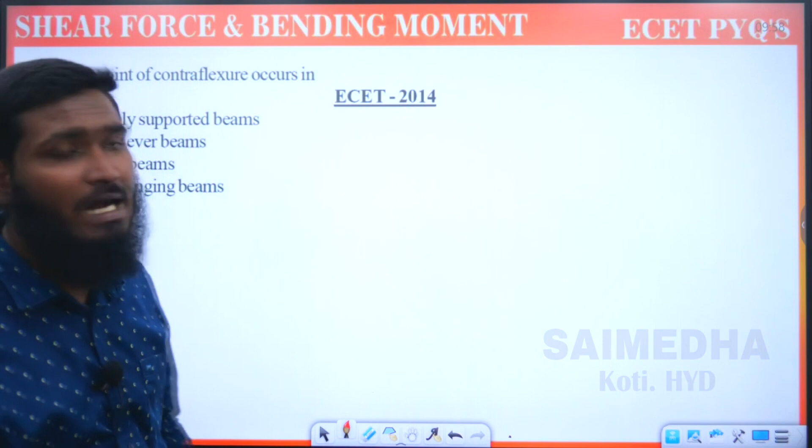Now the next point: the point of contraflexure occurs in. Now what is the meaning of this contraflexure actually? First let us discuss this part - what is the meaning of point of contraflexure?

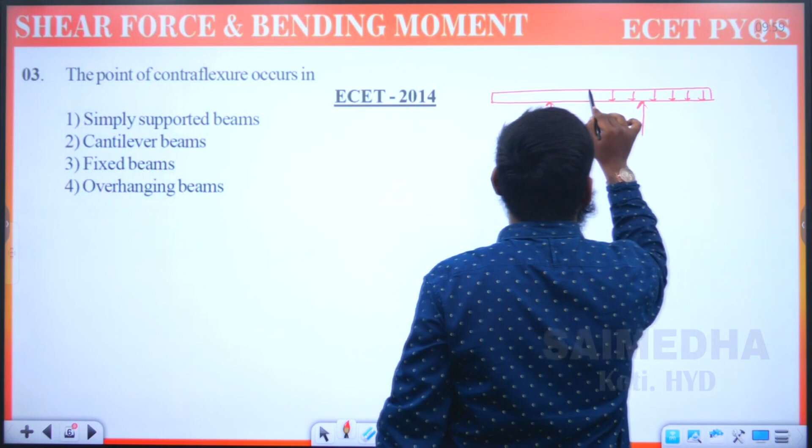Point of contraflexure means - let us take one simple example over here. First let us try to take the example of a double overhanging beam. If you are taking a double overhanging beam, this is the double overhanging beam we have taken, and we are having a UDL on this.

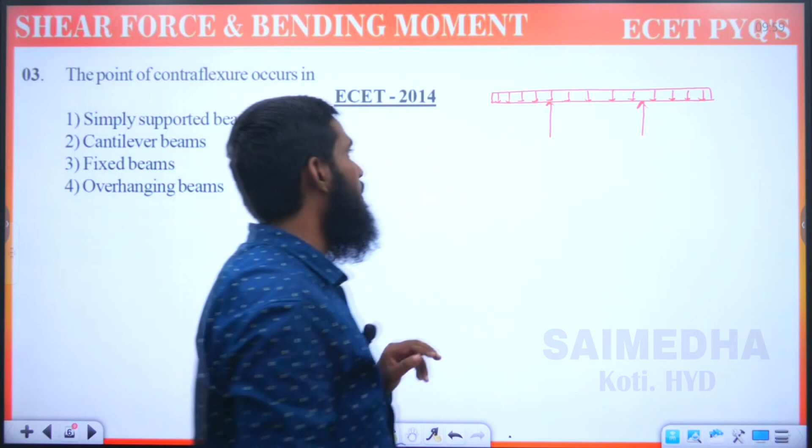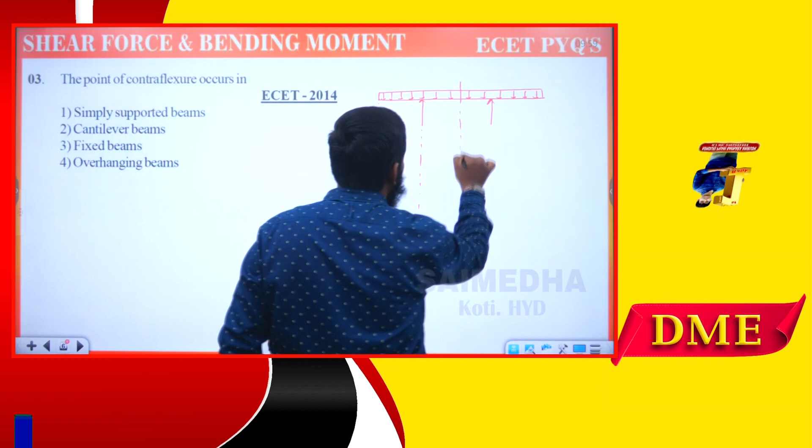I am giving the direct shear force diagram and bending moment diagram for this double overhanging beam with the UDL. Now let us take this part, now let us draw the shear force diagram and bending moment diagram for this.

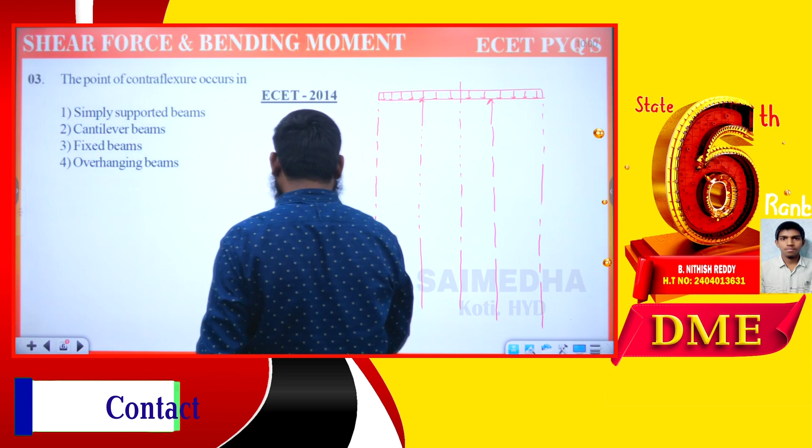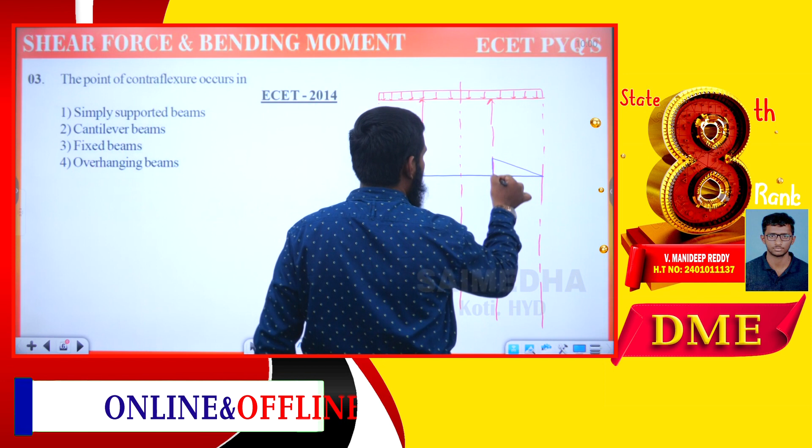So if you are taking this one, the shear force diagram for this will be getting it as - let us take this part as this one, and this part, then this one and this part. Okay, so this is the shear force diagram we are having for the double overhanging beam with UDL.

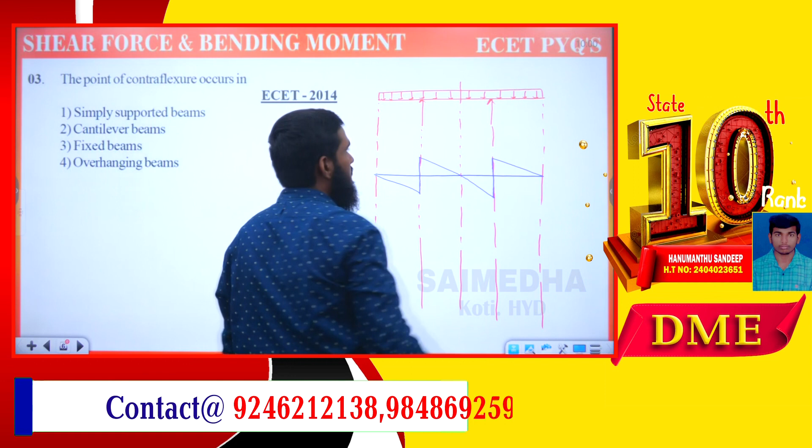Directly I am drawing over here. We are not having any concept for this part, meaning we are not interested in it. Directly whatever the question we are having, we have to remember the diagram, that's it.

Now let us draw the bending moment diagram over here. So for the bending moment diagram, what we are taking - let us see this part. So for the bending moment diagram, we are getting this part as, okay, like this, something like this. We'll be getting the bending moment diagram for this.

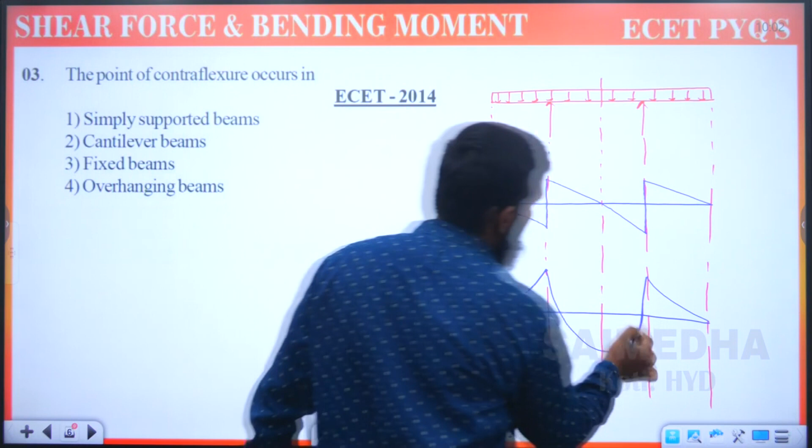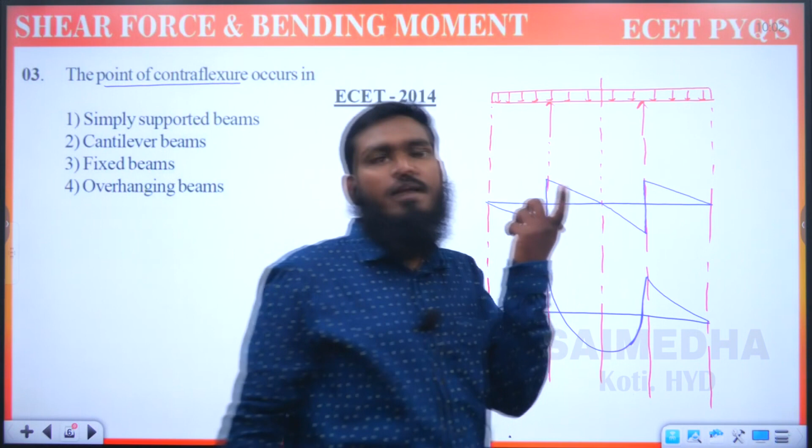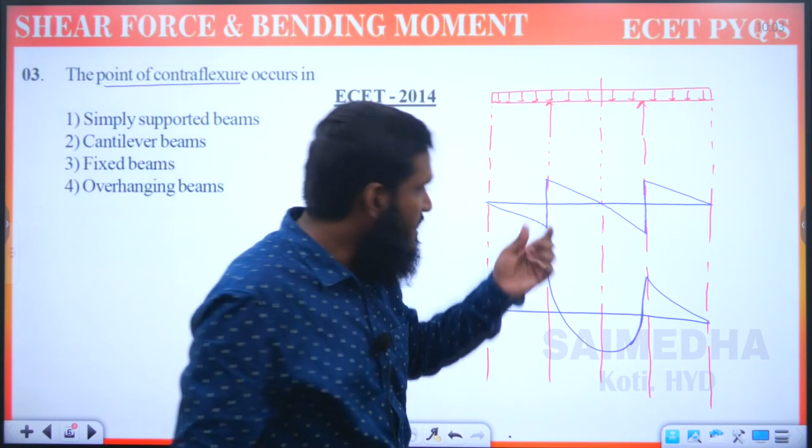So whenever we are having the shear force diagram and bending moment diagram, now what is the meaning of point of contraflexure? Point of contraflexure means whenever the bending moment is changing its sign. Leave the shear force diagram, we are not concentrating on that. Now we are concentrating only on the bending moment diagram. In this bending moment diagram, whenever the bending moment value is changing, meaning from positive to negative or negative to positive, that we are calling it as a point of contraflexure.

So this part we have taken over here - this is point of contraflexure we are having, and this is also a point of contraflexure we are having. Sometimes it will be given that the bending moment is 0.

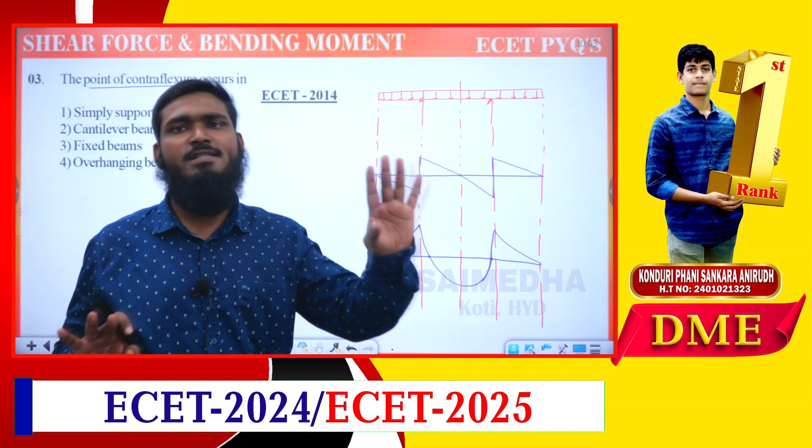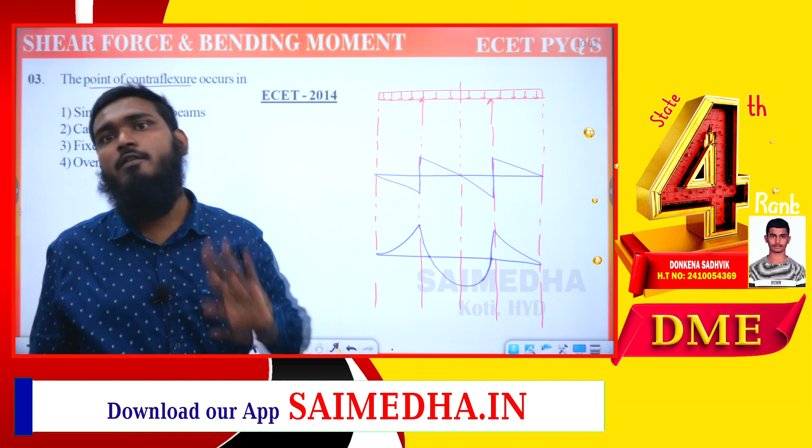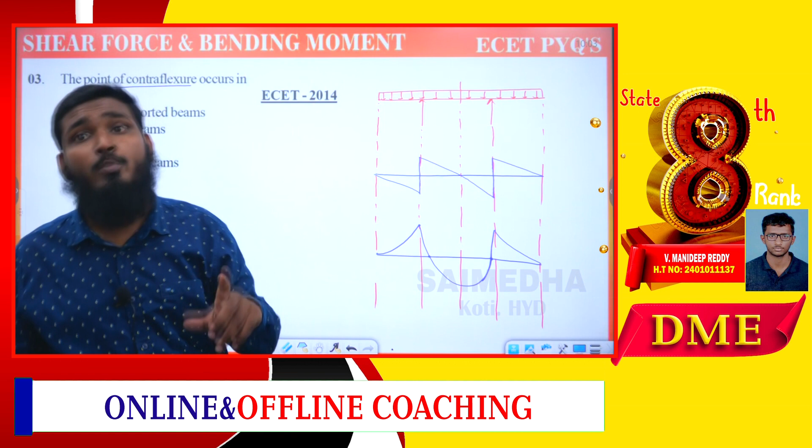In some cases it is also correct whenever the bending moment becomes 0. But if the options include that the bending moment changes its sign, that should be our first preference. Changing its sign means from positive to negative or negative to positive. If that option is not given, and instead it says bending moment is 0, then we can take that as a second preference.

This is the meaning of point of contraflexure. Now what is our actual question? The point of contraflexure occurs in which beam: simply supported beam, cantilever beam, fixed beam, or overhanging beam? Directly we can say that in overhanging beam we get the point of contraflexure.

But let me give some important points. First, take cantilever beam - here is the point of contraflexure. How many points of contraflexure do we get here? You can remember directly: first we take cantilever, second we take simply supported beam. In these two beams, we are not getting any point of contraflexure, so it will be 0.

Now next we take propped cantilever. If you take propped cantilever, and also a single overhanging beam, then we get 1 point of contraflexure in each. In both cases we are getting a point of contraflexure.

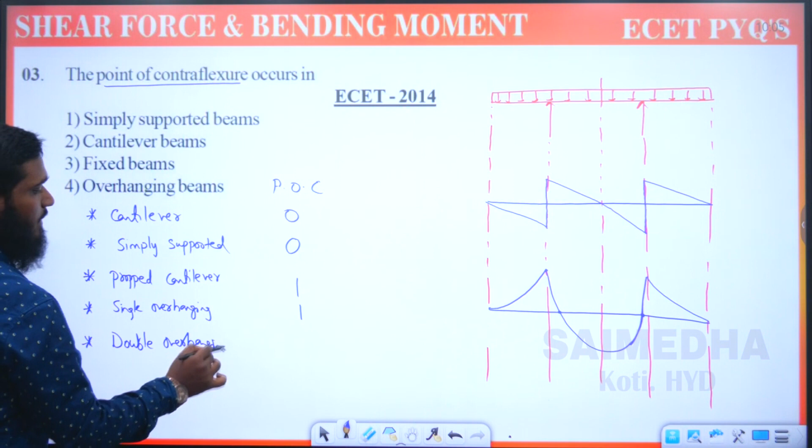Now next we take double overhanging beam, and the next case we take fixed beam. For fixed beam as well, we get 2 points of contraflexure.

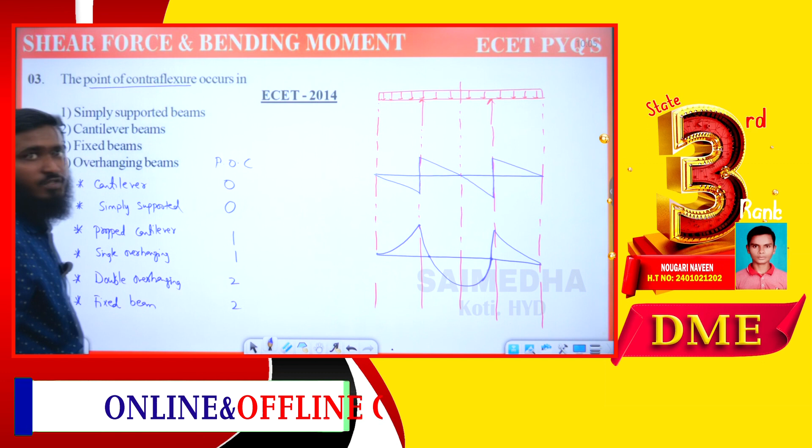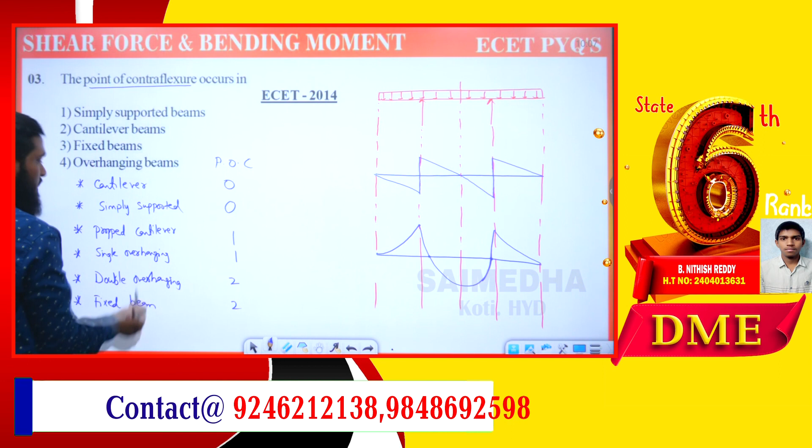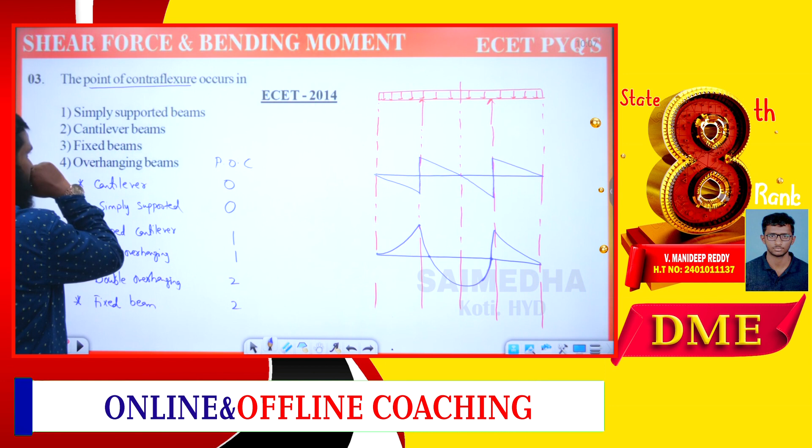So looking at this question, for point of contraflexure: simply supported beam we have 0, cantilever beam we have 0, but for fixed beam as well as overhanging beam we have the point of contraflexure. So actually both options are correct, we can go with both. As per the ECET key, the answer given is overhanging beam, but both options are correct.

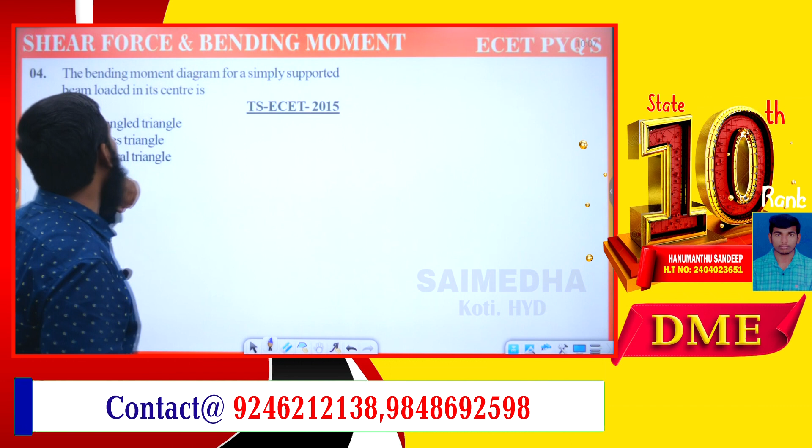Now let's go to the next question: the bending moment diagram for a simply supported beam loaded at its center. In this first question, we have a simply supported beam with a point load at the center. So what is the bending moment diagram we get?

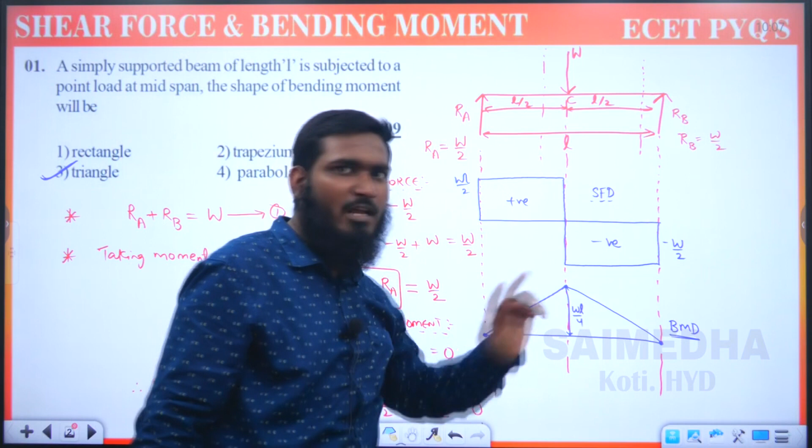The bending moment diagram looks like a triangle, but which type? Either right angle triangle, isosceles triangle, or equilateral triangle. Right angle means one of the angles should be 90 degrees - we don't have that here, so it's not right angle. Equilateral triangle means all 3 sides should be equal, but here this side is equal while this other side is somewhat longer, so it's not equilateral either.

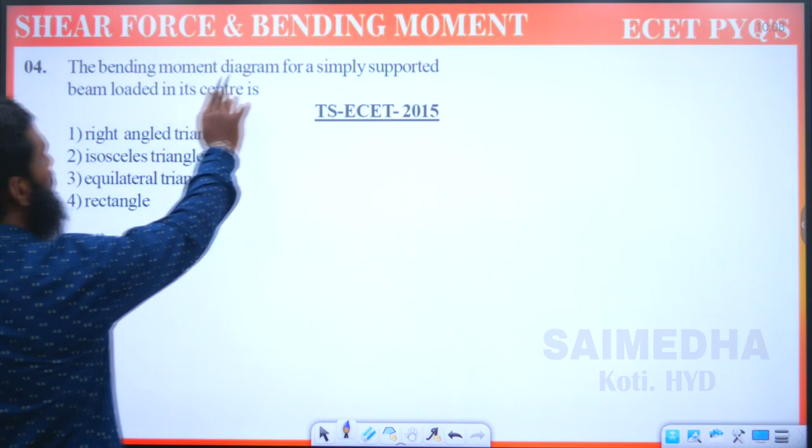So if any 2 sides of a triangle are equal, we call it an isosceles triangle. Using the same diagram and question, what is the answer? The bending moment diagram for a simply supported beam loaded at its center is an isosceles triangle.

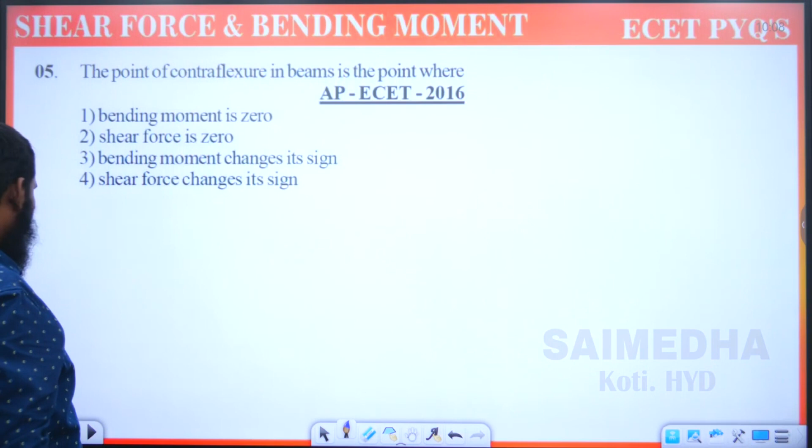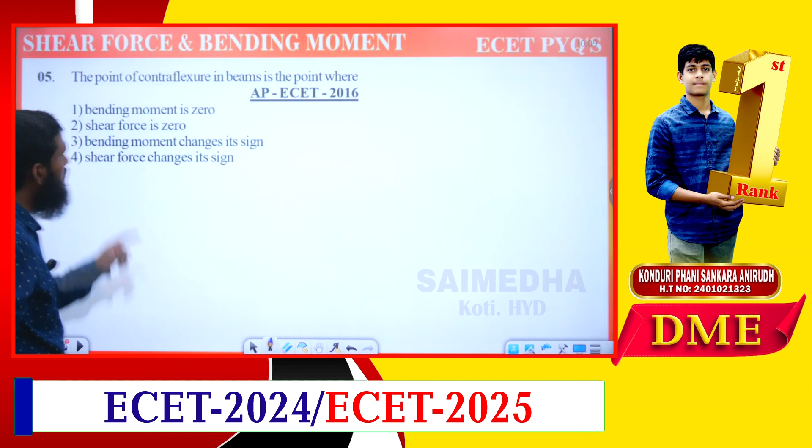So what I have told you, if this point is given, we have to go for that answer only. Suppose if this part is not given, then we can go for the second preference as bending moment is 0. So we are going for this part, bending moment changes its sign. Third option is correct.

Now next question: in a beam where shear force changes sign, the bending moment will be. Now same case we have taken over here, listen carefully.

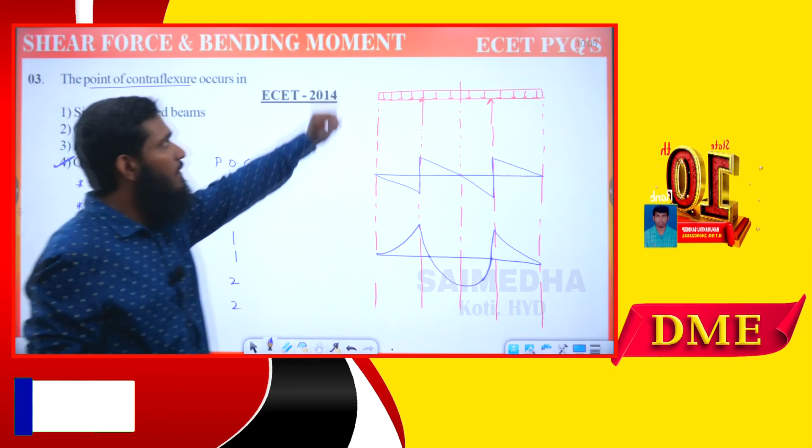In this also, if you have taken this part, this diagram we have taken, and we have taken one more diagram in this also. Suppose if you are taking this diagram over here, what we are getting, this part is shear force, it is becoming 0.

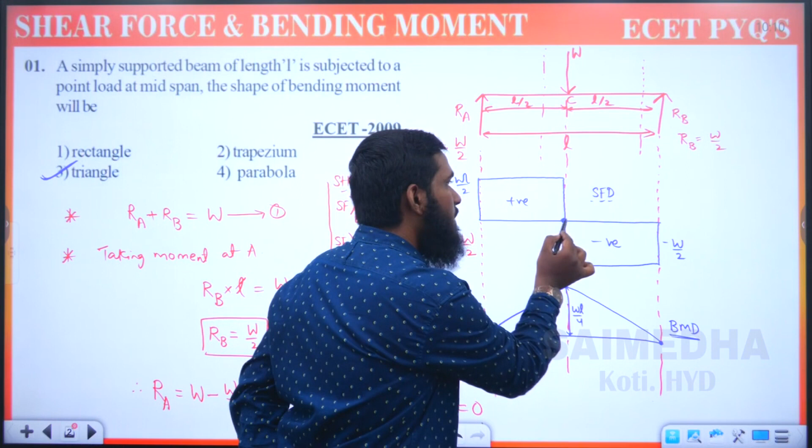So whenever shear force is becoming 0 over here, listen carefully, whenever shear force is becoming 0, what is the bending moment we are getting? Bending moment is maximum. So for this part we have taken over.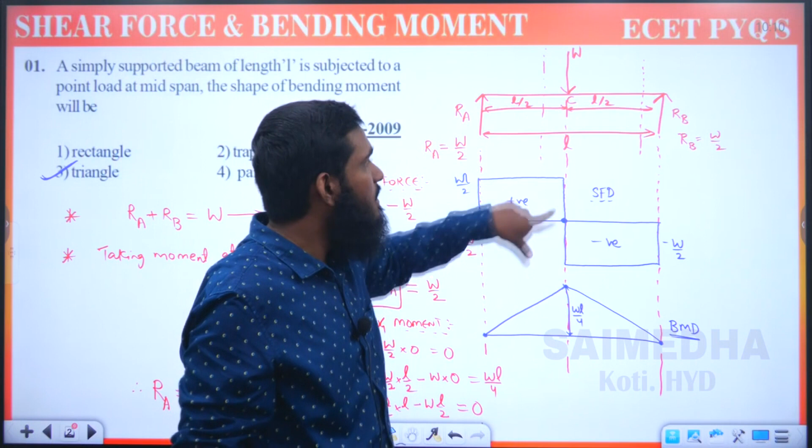If you are considering this example, we can take shear force equal to 0, means what is bending moment we are getting? Maximum. But actually what you have to remember is whenever shear force becomes 0, it can be maximum or minimum.

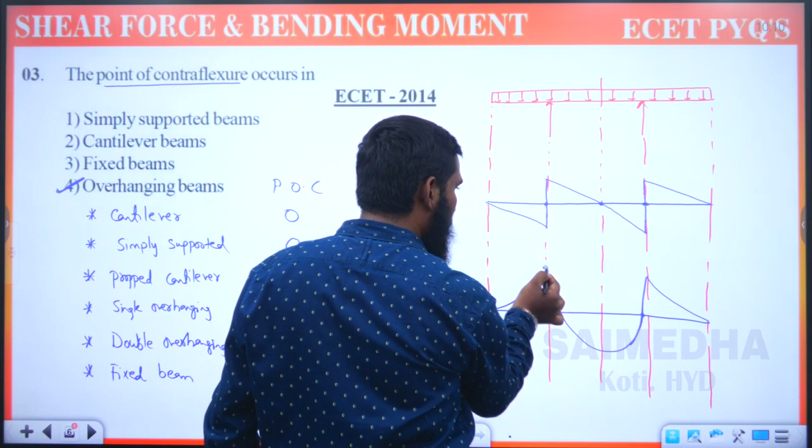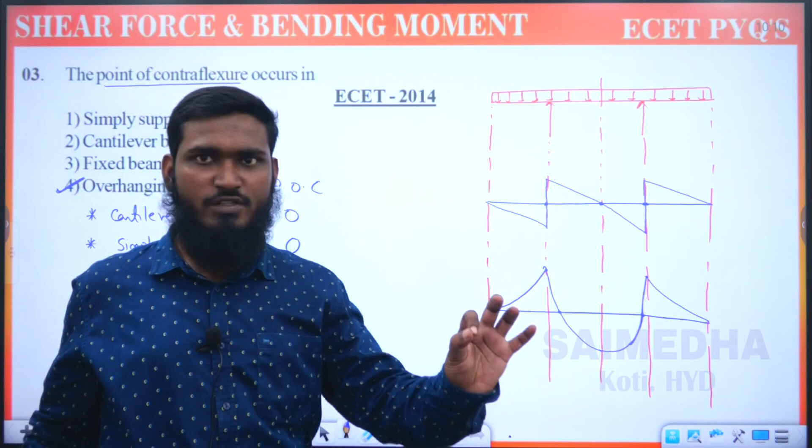So over here whatever values we are getting, these are bending moment values. Shear force is becoming 0 at multiple points, and at these points what is bending moment? If you check those values, we are getting one minimum value and one maximum value. So we can't say directly that whenever shear force becomes 0, the bending moment will be maximum only or minimum only.

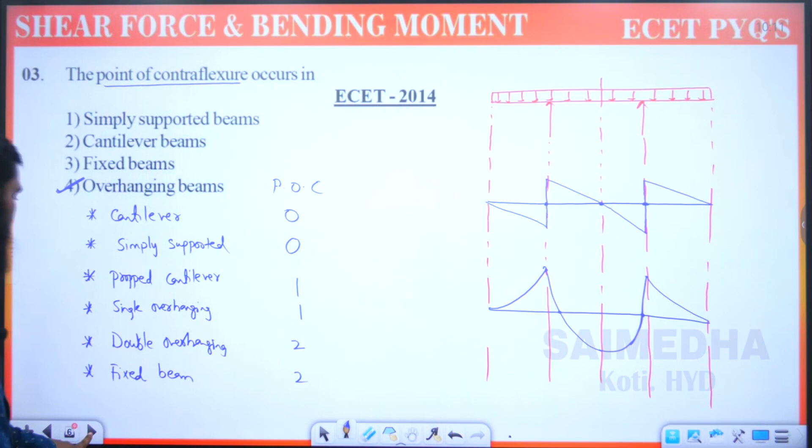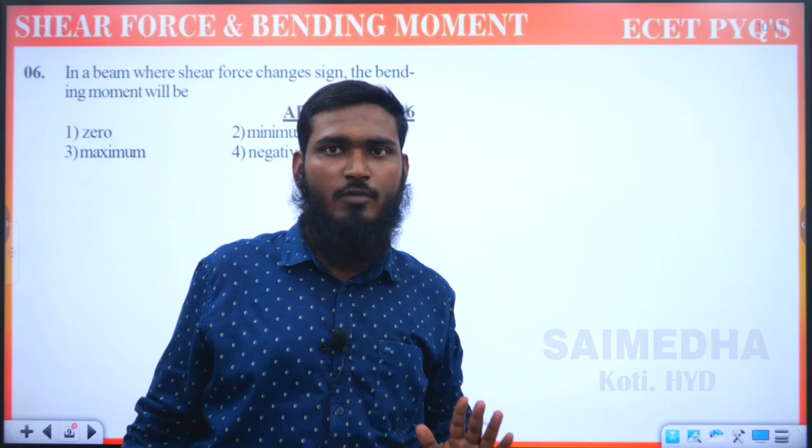We can't decide that part directly. It can be maximum or minimum. But if you are seeing this question, listen carefully: if it is mentioning maximum or minimum, either one, then we have to go for that option. If that option is not given, then what do we do? 0, minimum, maximum, negative means...

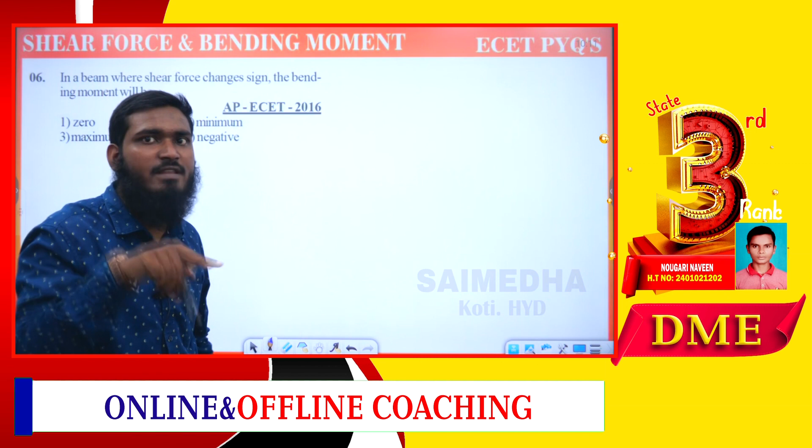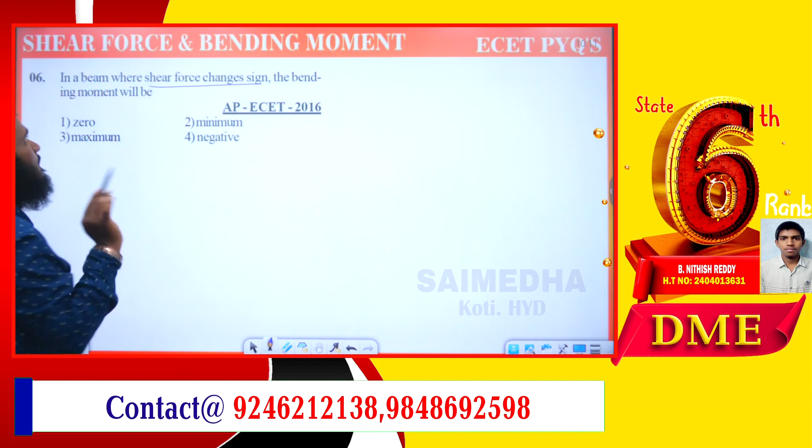So the first question we took was a simply supported beam with a central point load. According to that example, we assumed that whenever shear force becomes 0, or whenever shear force changes its sign, the bending moment will be maximum. So if maximum or minimum is given as an option, we go for that. If that's not given, then we go for maximum.

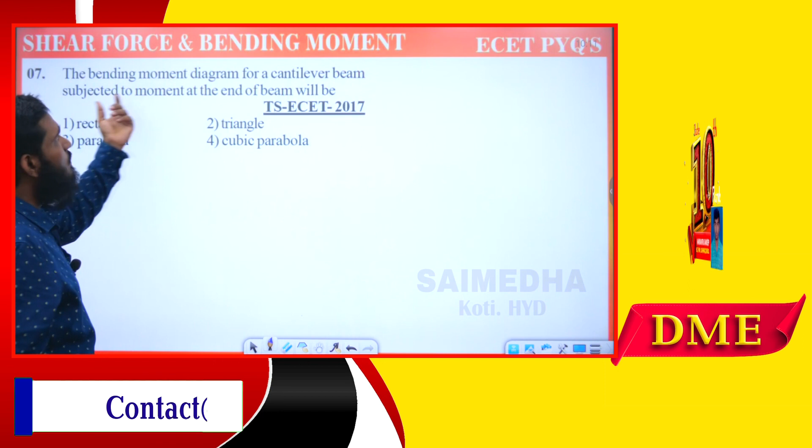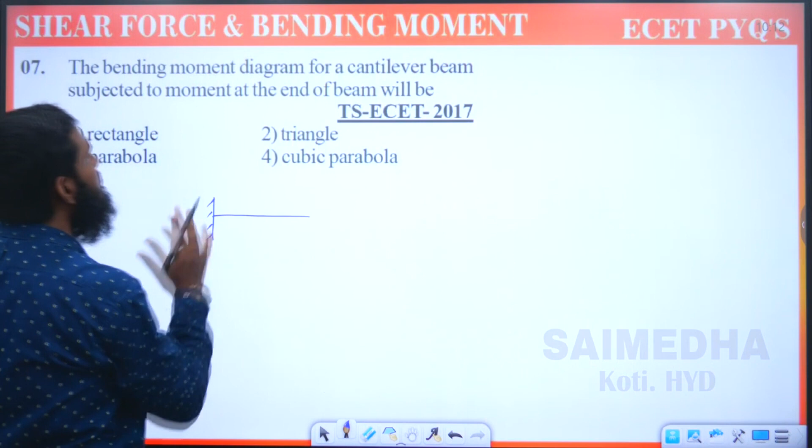Now next question: the bending moment diagram for a cantilever beam subjected to moment at the end of the beam is. So what we are having for cantilever beam, we are having the moment over here.

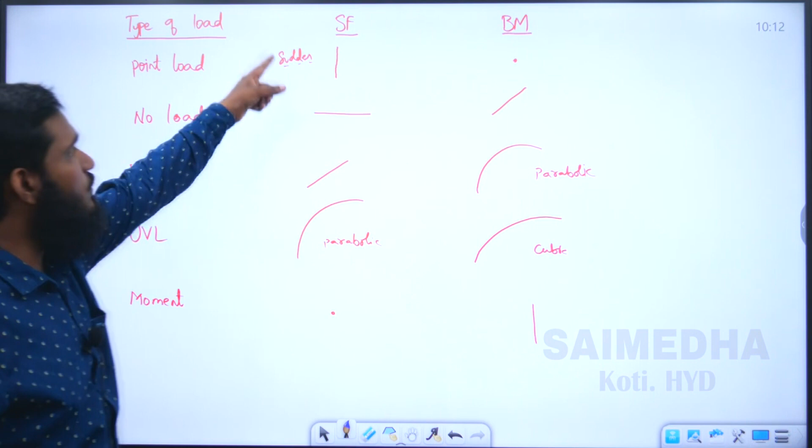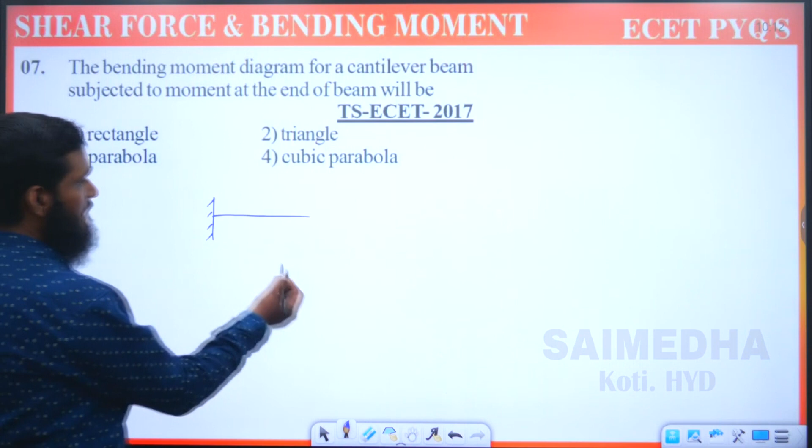If we are having moment, for shear force it will be a point, and for bending moment it will be a vertical line. So whenever we are getting the vertical line, what will it look like? Suppose if you are having a vertical line, then we are having this part. Whenever we have a vertical line, we are having a sudden change.

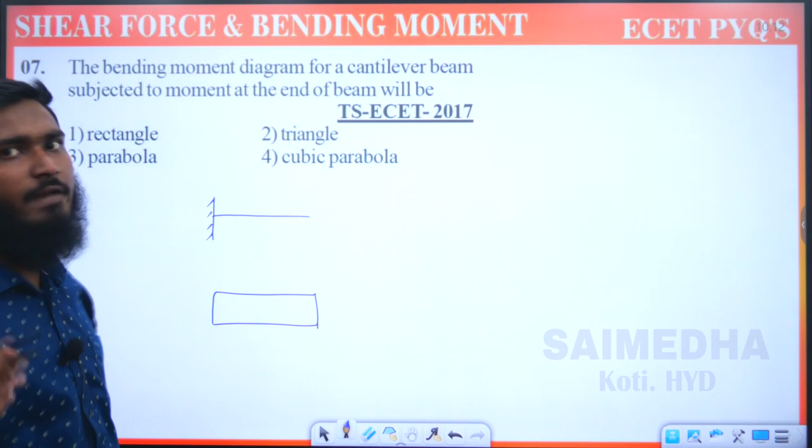If you are having a sudden change over there, then what do we take? It will be looking like a rectangle. Sudden change means we have to remember only one figure: whenever we have sudden change or a vertical line, we take it as a rectangle. So over here also, it will be looking like a rectangle. Option 1 is correct.

Now next: the maximum bending moment caused by a large number of equally spaced identical loads on a simply supported beam.

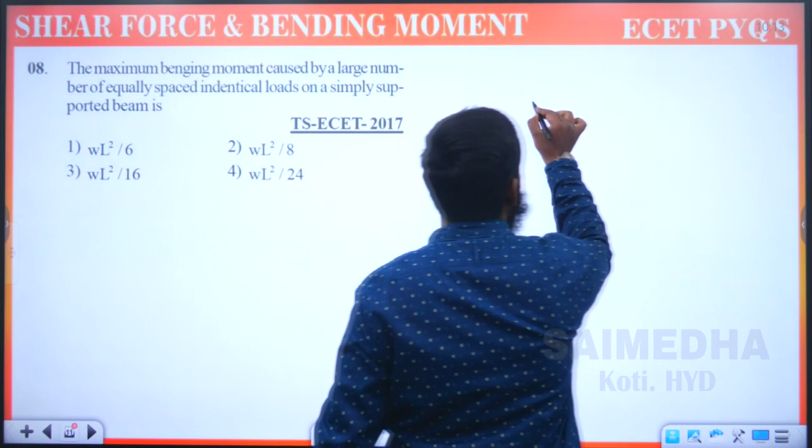Now for this we have to discuss, maximum bending moment caused by large number of equally spaced identical loads on a simply supported beam. We are taking the case, now listen here carefully. This is the simply supported beam we have taken.

This is simply supported beam and we are having a UDL. So this is RA we have taken, and this is RB we have taken, and this is W we have taken. UDL part we have taken, and this complete length we are taking as L.

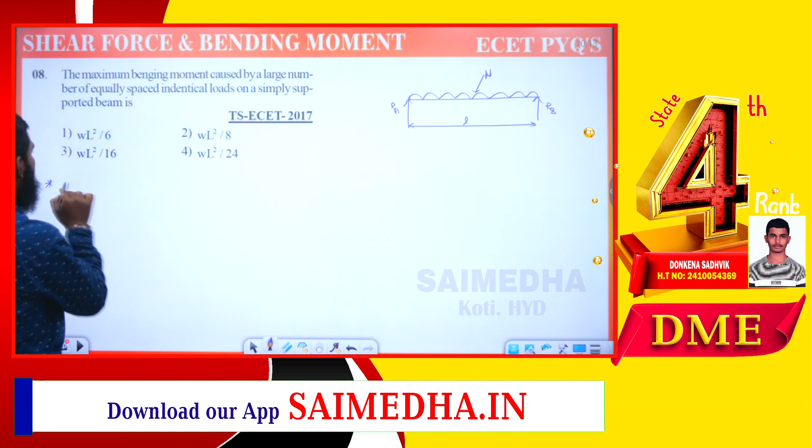Now first, as we have taken the first point, algebraic sum of all the forces means RA plus RB, it is equals to... Now this UDL part, whatever is given, actually it is not the load.

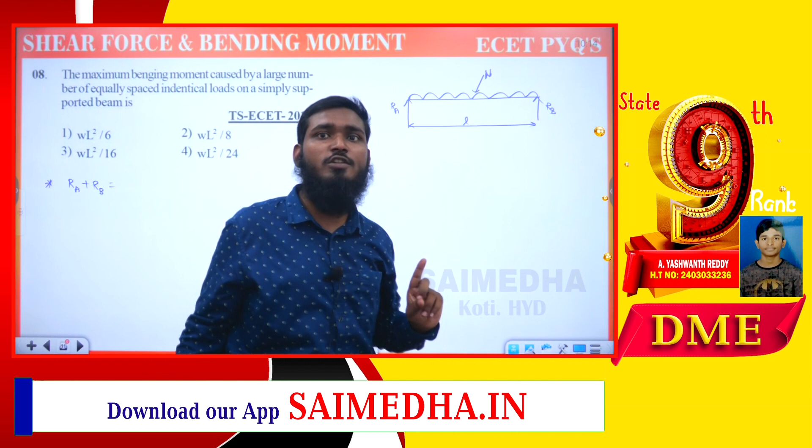Now how do we convert that UDL into load? We have to take the area. This UDL is also called a rectangular load. So for rectangular, what is the area formula? Area means length into breadth.

So over here we are taking this part as W into L. Length into breadth means we are taking it as W into L. So we are taking this part as W into L. This is the first equation we are having.

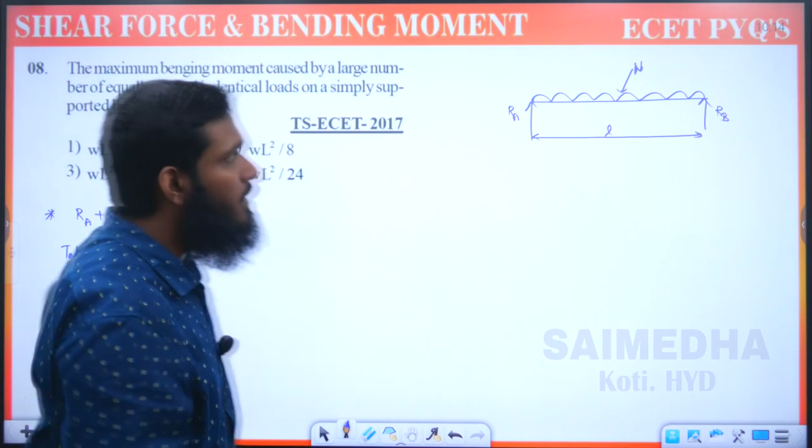Now after that, if we are taking moments at point A, what can we do over here? Taking moments at point A means first this part becomes anti-clockwise and this becomes clockwise. So for that moment we have RB into L, it is equals to...

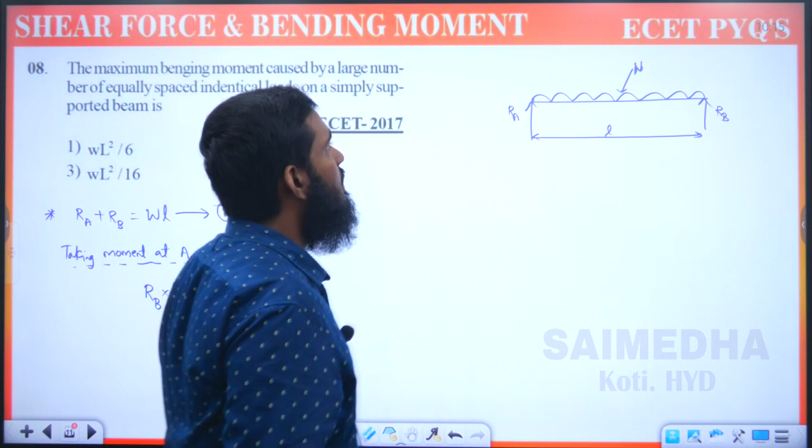Now for this part, again for moment, we have to write load first, then the length. What is the load we are having? W into L. So we have this part as W into L into, now what is the distance? So distance we have to take as L by 2. We have to take half of this part, L by 2.

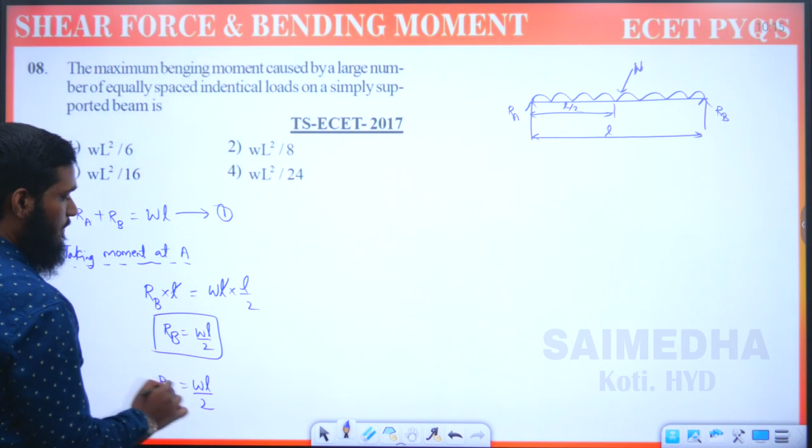If we are taking L by 2, now what happens? This 1L gets cancelled. So RB value is equals to WL by 2. Now as we have RA plus RB equals WL, if we substitute RB value, WL minus WL by 2 means we get RA value equals WL by 2. So RA value is equals to RB value is equals to WL by 2.

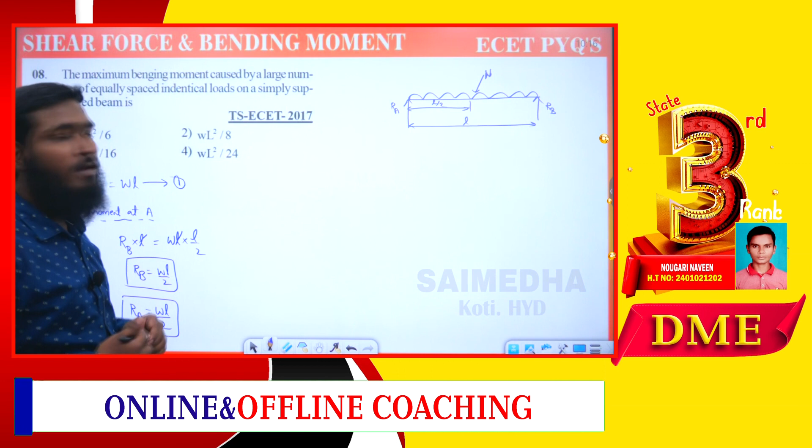Now after taking this RA value and RB value, what we are calculating is the shear force. First point is shear force at point B. Now what is the sign convention we have taken for shear force? Actually, whatever load we are having, after that we have to draw the imaginary line.

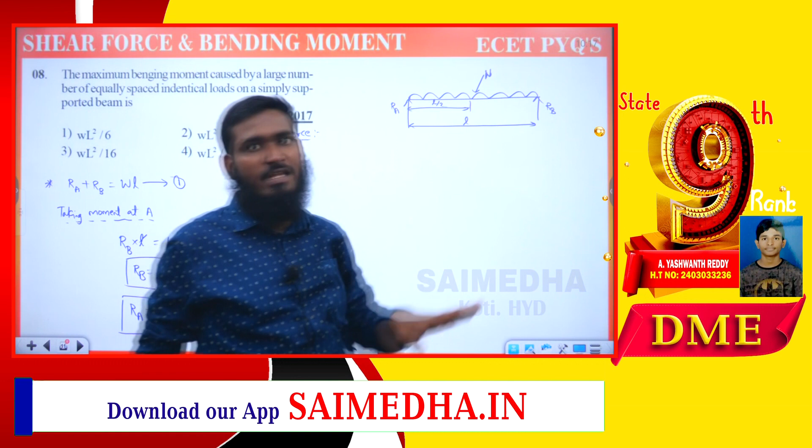If we are drawing the imaginary line after that load, it is coming under which quadrant? It is coming under the fourth quadrant, quadrant 1, 2, 3, 4, fourth quadrant. If it is coming under fourth quadrant, then we have to take it as negative. So we take this part as minus, and RB value is WL by 2.

Or else, as I already told you, whenever we have this symmetrical loading, directly we can find out RA value and RB value. How? Whatever load we are having, divided by 2. So what is the load we have here? W into L, divided by 2.

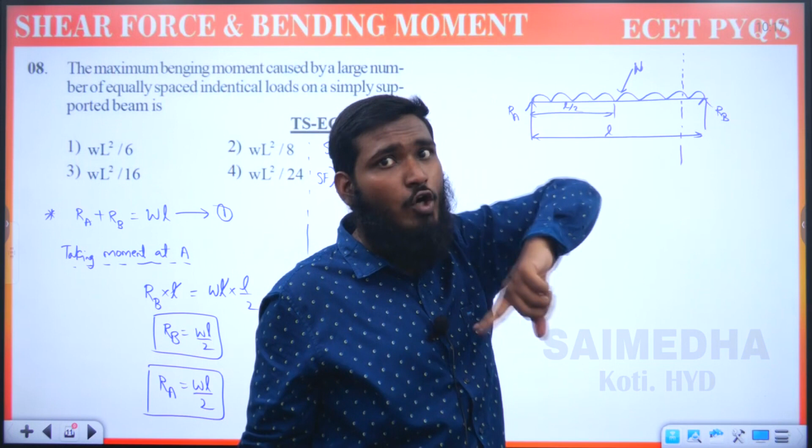Okay, so WL by 2, like that we have taken. Now let us calculate shear force at point A. Shear force at point A is equals to RA for simply supported beam, which is equals to WL by 2. Okay, this point we have calculated.

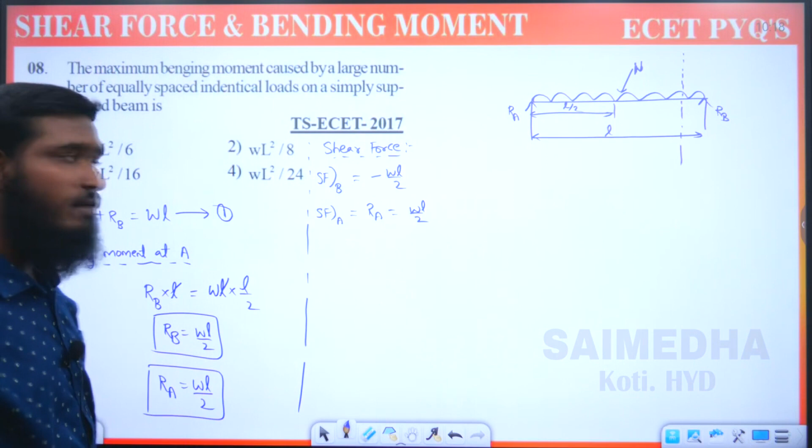Now let us try to find one more point over here if you are taking the middle point. Before that, let us go for bending moment.

So bending moment at point B is equals to 0, and bending moment at point A is also equals to 0. At the end supports whatever we are having, that bending moment will be equals to 0. Okay, this part we have taken.

Now let us take one more point over here. Suppose if you are taking at the midpoint, if you are taking this point as C, what we have taken? Point as C we have taken. So let us try to find out shear force at point C.

So what is shear force at point C we are getting? Now let us see this part. Point C means we are having this one. This is RB we are having. This is a load we are having, and this part is L by 2. Okay, this part is L by 2 we have taken.

Now if you are considering this part as UDL, okay, we are having this part as a UDL, and this part we are taking it as W. Okay, this part is W we have taken.

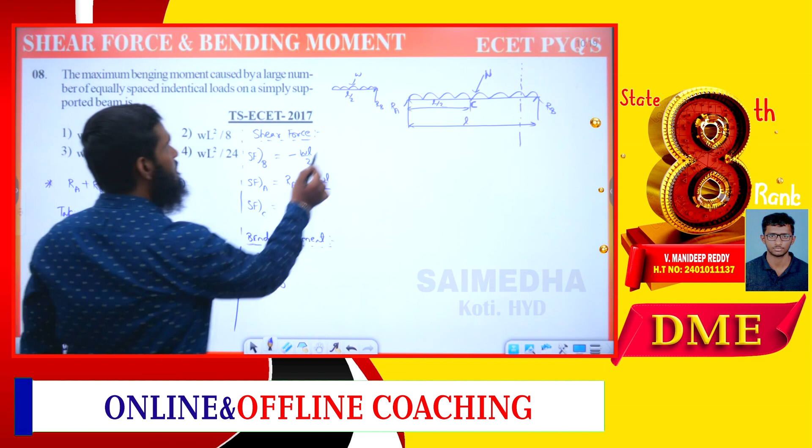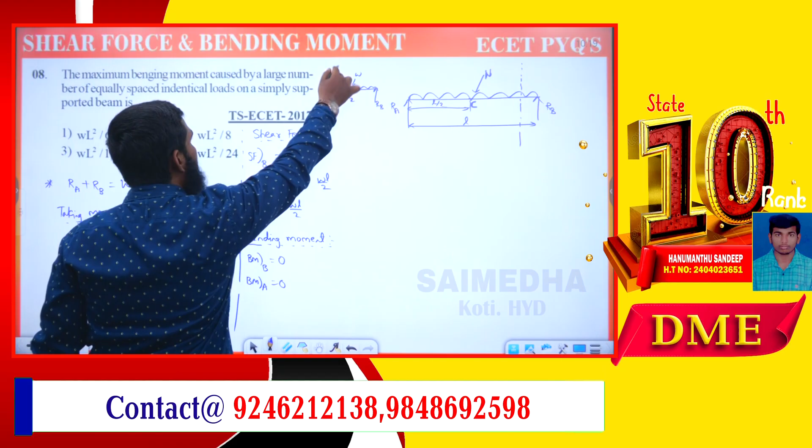Now let us find out at point C. At point C what we are having? So this part we are taking it as minus WL by 2 we have taken. Next, as it is in the downward direction means we are drawing the imaginary line. Yes, so it is coming under quadrant 1 only. If it is quadrant 1 means plus we have taken.

Then what is the load we are having for this? Load is equals to WL by 2. So plus WL by 2 minus WL by 2 means it is equals to 0. So shear force at point B is equals to minus WL by 2. Shear force at point A is equals to plus WL by 2. And shear force at point C, at the middle, what we are getting the answer? 0. Okay, so this one we have calculated.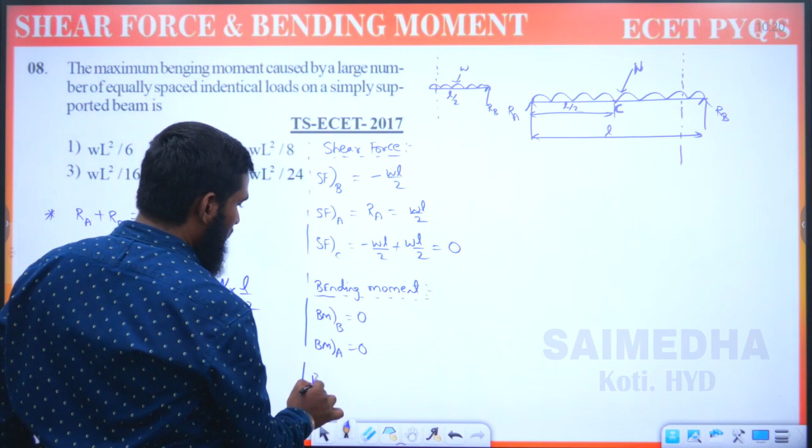Similarly, if we want to calculate bending moment at point C, what we are calculating? We are calculating bending moment at point C. So now let us try to convert this part.

So if you are trying to convert this part, this is RB we are having over here, and this complete length is L by 2. And this UDL, if you want to convert into point load, what we are doing over here is we have to multiply this part, so this will become W into L by 2.

Now what is the distance we are having? If this complete part is L by 2, now what will be half of this part? Half will be, this part will be L by 4 and this part will be L by 4. Okay, like this we have taken. Now let us do this part also.

So bending moment at C means first we are taking this part. So it is positive, what we have to take. So if you are taking positive, RB value how much we are having? WL by 2. Okay, this part we have taken, and up to point C means what is the length we are having? L by 2.

Okay, now next point. For this we are taking minus over here, because it will be like a sad face. So we have taken over here. Now what is the load we are having for this? WL by 2, and what is the distance we are having over here? L by 4. Okay, we have taken this part. Now let us calculate this.

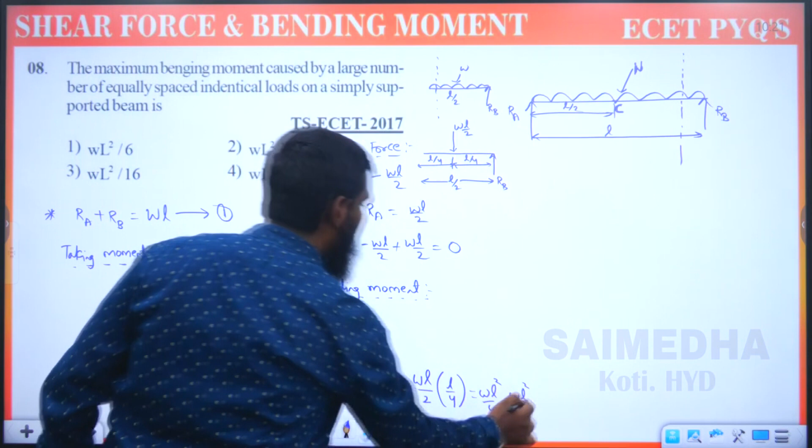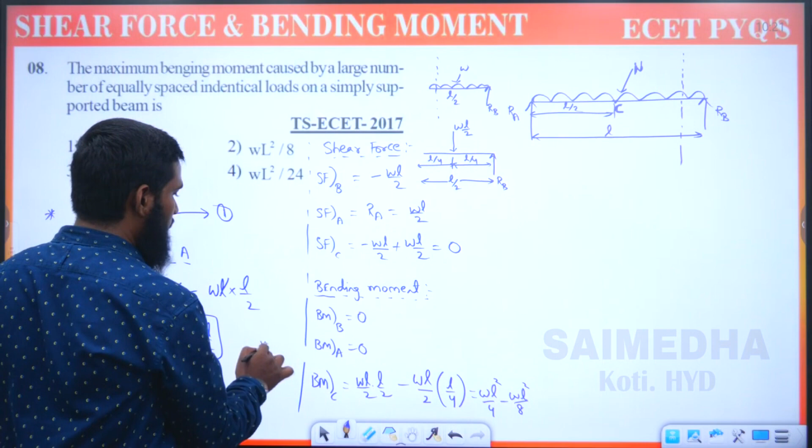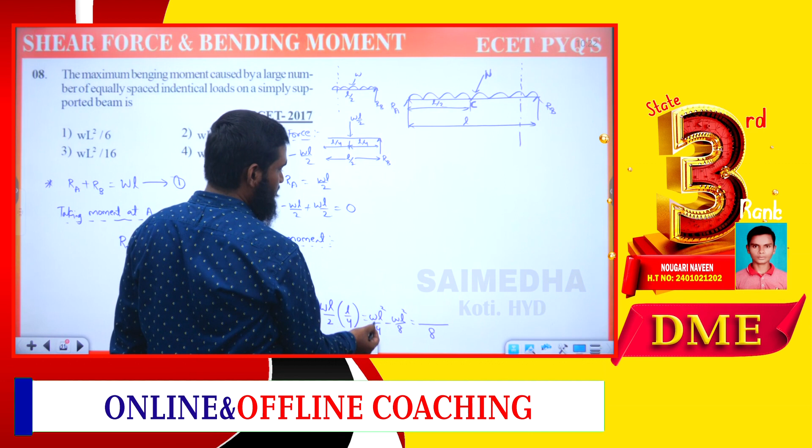What are we getting? WL square by 4 minus WL square by 2. 4s are 8, like this we have taken. So if you are taking WL square by 4 minus WL square by 8, what is the LCM we are getting? 4 we have taken, 8 we have taken, so 8 will be the answer. So this part is 8, and the next part will become 2WL square minus WL square, which means WL square. So this is the value we are getting.

So bending moment at point C is equal to WL square by 8. This part we have taken.

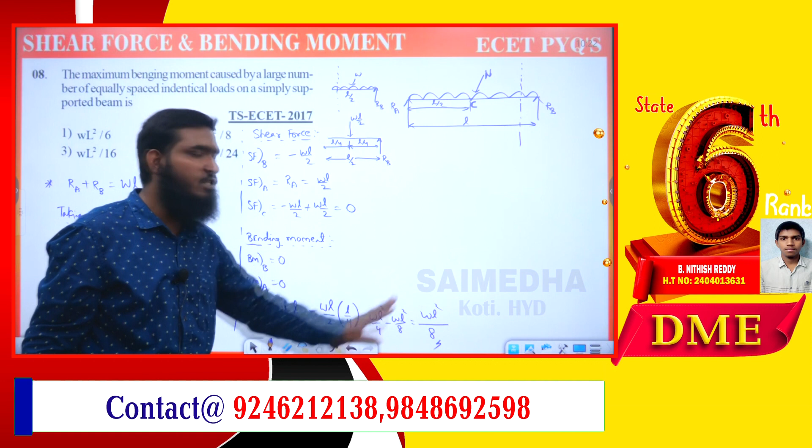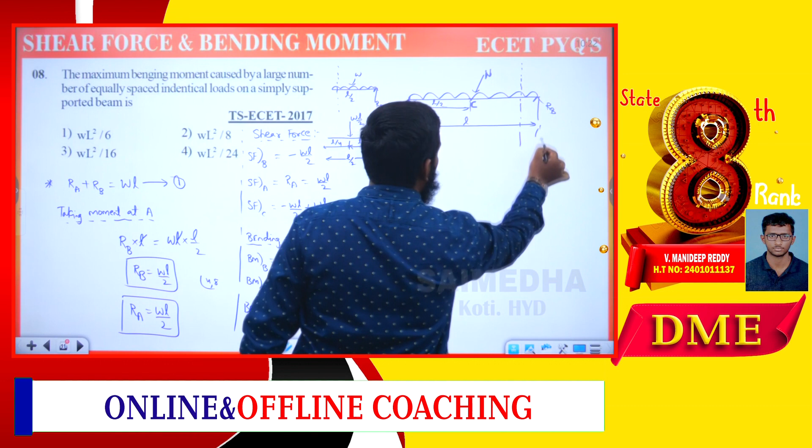Now after getting all the values of shear force and bending moment, let us try to draw the diagram. What is the diagram we are getting for the shear force and bending moment? Now let us take the shear force.

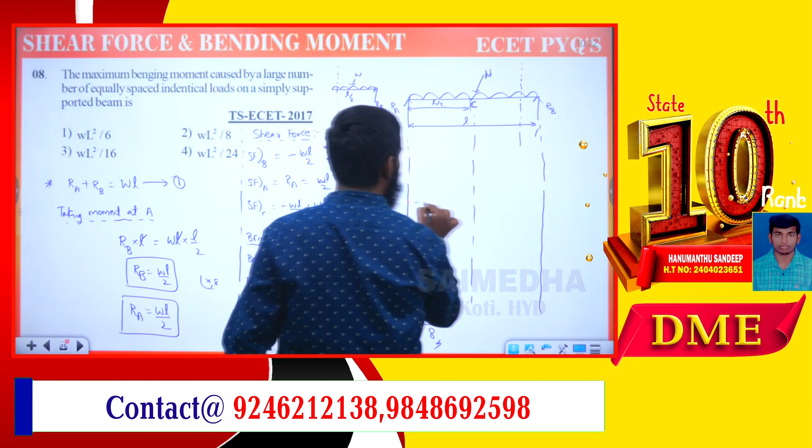So if you are going for shear force, shear force at point B is equal to minus WL by 2. We are having the point load, we have taken it vertical, minus WL by 2. Now for shear force at point A, we are getting WL by 2, this part we have taken as WL by 2.

Now next, shear force at point C means we are getting 0 over here. Now whenever we are having UDL, what do we have to take? For UDL, shear force is an inclined line. Similarly for this part also we have to draw an inclined line, so this is the shear force diagram.

This is the shear force diagram we have taken. This is the negative part we are getting, this is the positive part we are getting. This is minus WL by 2, this is 0, and this is plus WL by 2. This is the shear force diagram.

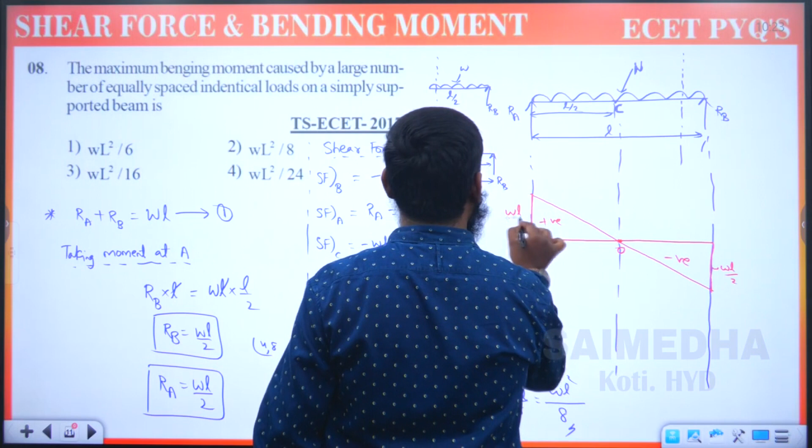Now let us try to draw the bending moment diagram. What will happen? Bending moment at point B is 0, bending moment at point A is 0, bending moment at point C means how much are we getting? WL square by 8, WL square by 8.

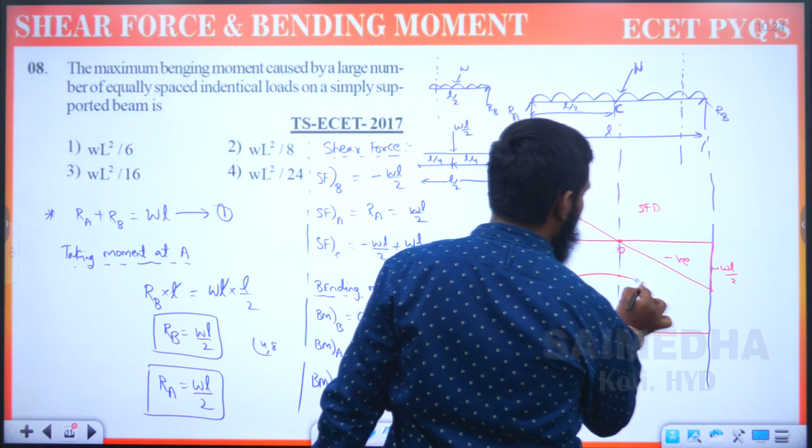Now for UDL, what bending moment diagram do we have to draw? Parabolic. So if you are taking parabolic, this part is parabolic, like this we have taken. So this part is 0, this part is 0, and this is maximum, what we are getting here? Maximum bending moment.

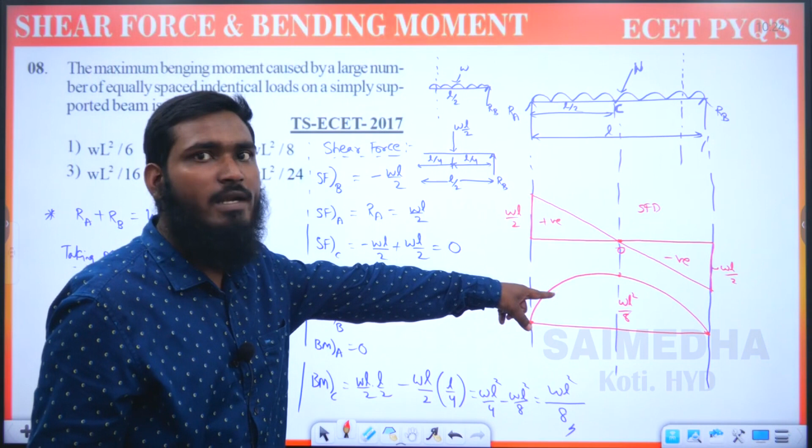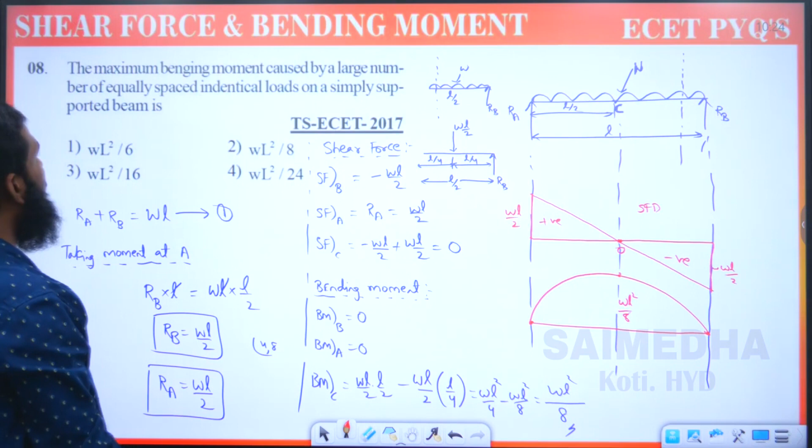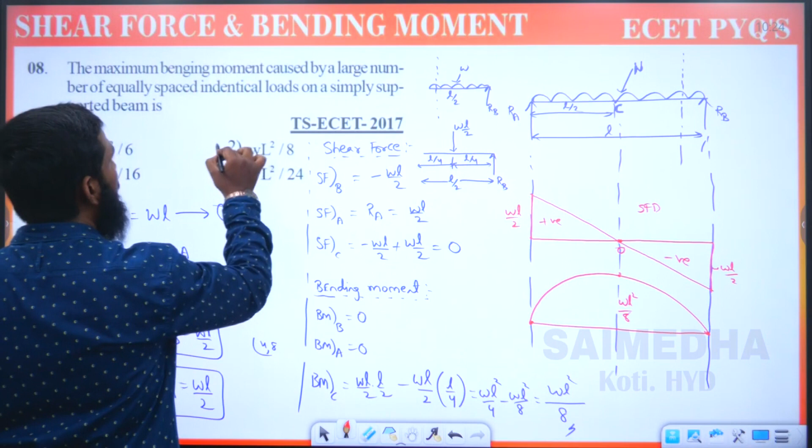If you are getting maximum bending moment, what we have written is WL square by 8. So the maximum bending moment caused by a large number of equally spaced identical loads on a simply supported beam is WL square by 6, WL square by 8, WL square by 16, WL square by 24. So we can go with the option WL square by 8. Second option is correct.